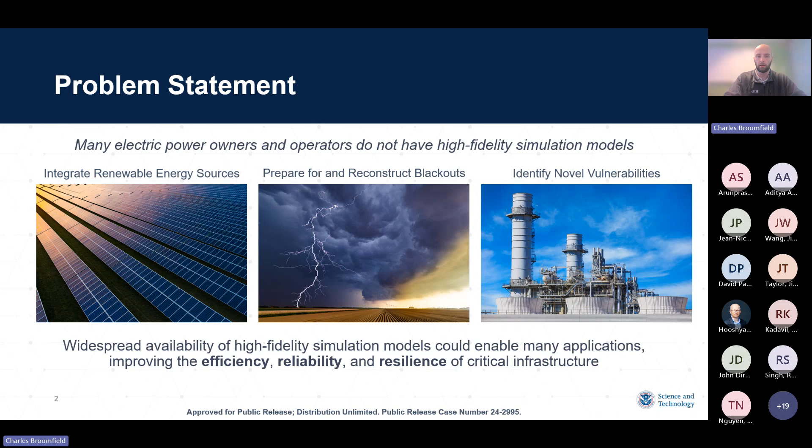So what we really want to see is we want to see high fidelity simulation models in the hands of all of the people who could use them, because these models can be used to support these purposes that we would like to see. So jump to the next slide here.

For the remainder of the talk, I want to cover just four big topics. And first is why developing these models is so difficult, right? So much of our work is trying to get these models into the hands of different people. So why don't they have them? Why are they so challenging right now? Second, I'll talk about the two different ways that we really see automation being used to decrease development time without requiring a huge amount of information from the end user, because that's also a burden.

Third, I'll give you a tour of the critical infrastructure model building application, or CIMBA, which is what we sort of refer to the process that we're building to try and help either solve this problem or at least alleviate that problem. And then lastly, I'll just talk about some of the design principles that are shaping our work today, as well as really shaping our work in the future as we continue to develop this and try and push this forward.

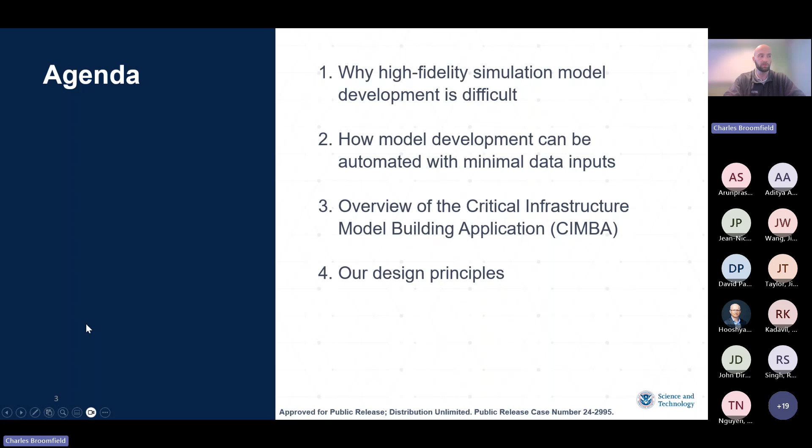So, as I said earlier, a lot of electric power owners and operators don't have the high fidelity simulation models of their own networks, much less digital twins. But these models are very useful. So the question is, well, why don't they have these models? What's getting in the way of them having this tool, which we know can be used for so many different uses? And the short answer is because building these models is really hard.

So one of the big challenges that we've heard is just how time consuming it is, because it can take a very long time to assemble a simulation model of an entire grid that we're trying to model. So even just getting your head around all of the infrastructure that's out there takes a lot of time, much less truly understanding all of the different factors that are going to influence how those components behave in the real world. Now, this is sort of the second challenge, which is just the amount of effort that goes into gathering all of this data.

Because traditionally, building a high fidelity simulation model requires a lot of experts and a lot of work to collect all the precise parameter data for all these different components, which we need to understand to really model this system well. Now, this is a really difficult process, and it also really does not scale very well. It becomes exponentially more challenging as the network grows because there's so many connections and so many parameters to take into account.

But you need these accurate estimates of all these model parameters if you want to have confidence in the simulation results that come out of that model. And I don't think that any of this is much news to any of you. You probably have worked in the space for even longer than I have. But either way, this of course means a lot of experts spending a lot of time, a lot of effort to build a simulation model.

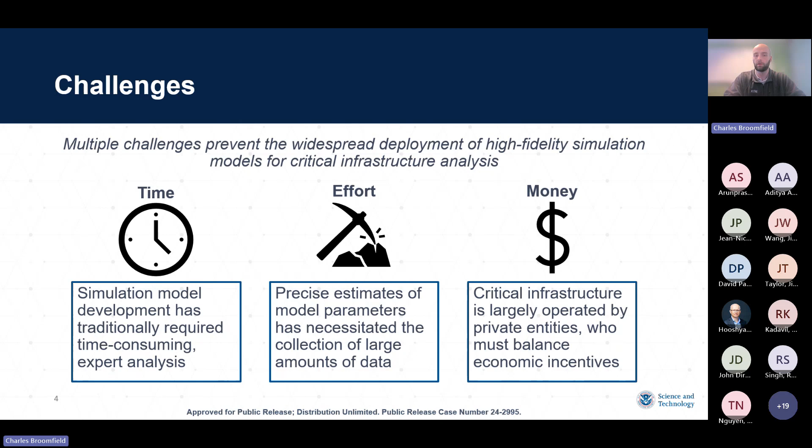And that's where we hope we have some good news, because we really think that some of the steps of developing these simulation models can be partially automated. And there's really two parts of development in particular that we think can really be sped up potentially quite dramatically. So the first thing that we think could be partially automated is this initial assembly of a simulation model. Because these critical infrastructure networks, and especially electric power networks in particular, are extremely large and complex.

So imagine you had a library of all of the different transmission grid devices, and that library would store the parameters for these different particular components, right? That's not a massive database. It's large, but it's not massive. And if you did have this library, then you have all of the building blocks you need already, right? So you would just need to know how to connect them all together, and then all of a sudden you would have a model of the entire network.

So instead of building a simulation model from scratch every single time you're trying to do this for a network, what this enables is you can effectively build it out of Legos. So at least in theory, this model assembly step would get easier with scale as this library becomes more and more complete. And the dream scenario is you have absolutely every single component that's on the network already stored in your library. All you have to do is look up the data that you need. So this doesn't exist right now in the electric power sector, but it's not impossible for something like this to exist. And something like this does exist in other domains, right?

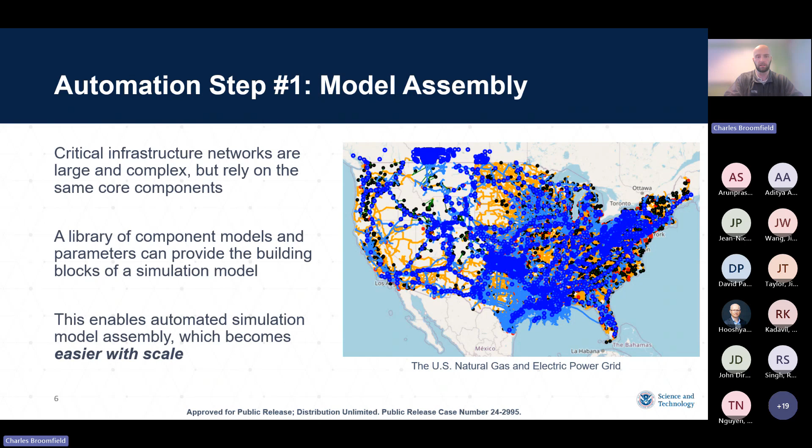It wouldn't necessarily be perfect unless you had absolutely perfect parameter data for every single component, which is a little unlikely. But it would maybe be 80% of the way there with much, much less work than this currently requires. So even though this doesn't automate the full process, this could be really, really valuable in speeding up the time to develop these simulation models.

Now, the second step that can be automated really relies on breakthrough capabilities of machine learning, which of course is all the rage right now. But traditionally, machine learning has not been present in this process. Traditionally, a simulation model has been built by measuring the parameters of the network, either on a real-world system itself or a physical replication of it.

Because if we already have data describing real world network operations, right? We already have the frequency over time for all of these electric generators. Then what we can do is feed this real world operational data back through a machine learning process, and we can accurately estimate the real underlying parameters that produced that original operational data, right?

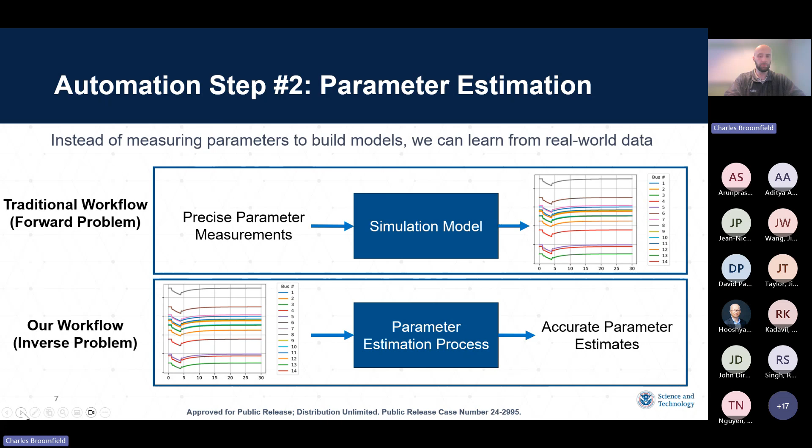But between these two processes that I just talked about, this is why we think it's possible to build high fidelity simulation models without a ton of data from the end user. Because the data can be simplified by either providing it through the reference library, which I just talked about, or it can be learned automatically in this refinement step. So let me take a couple of minutes to walk through what we're actually building.

And we call this the Critical Infrastructure Model Building Application, or CIMBA. And we think of CIMBA as 3 stages, and I'll go into detail on these in a moment. But what I want to point out here on this slide is that these first 2 stages, the model generation stage and the model refinement stage, correspond pretty much directly to the 2 steps I just talked about

in terms of automation. So in the model generation stage, we try to automate the initial assembly of a simulation model. And here we're really speeding up the development by pulling in pre-stored data from a component reference library. So this model generation stage does produce a simulation model, but it would not be considered high fidelity, not at this point.

So in the second stage, the model refinement stage, this is where we're using that machine learning process trained on operational data from a real electric power network to then refine those parameter estimates and end up with a refined, high fidelity simulation model that can accurately perform transient stability analysis. And then that model can be applied for a whole bunch of different purposes in the last stage. So again, vulnerability analysis is sort of the focus behind our work, but there's lots of other things you can do with that.

Now, I do want to emphasize that CIMBA is still in its early days, and there's definitely more research we'd like to do to get this deployed at scale for large power networks. But something I want to point out here, too, is that while we show CIMBA as one big integrated process, the two functions we're talking about here, the model generation and the model refinement, are somewhat independent functions. They're each at different levels of maturity. They each have very different challenges that need to be addressed to really make this work at scale.

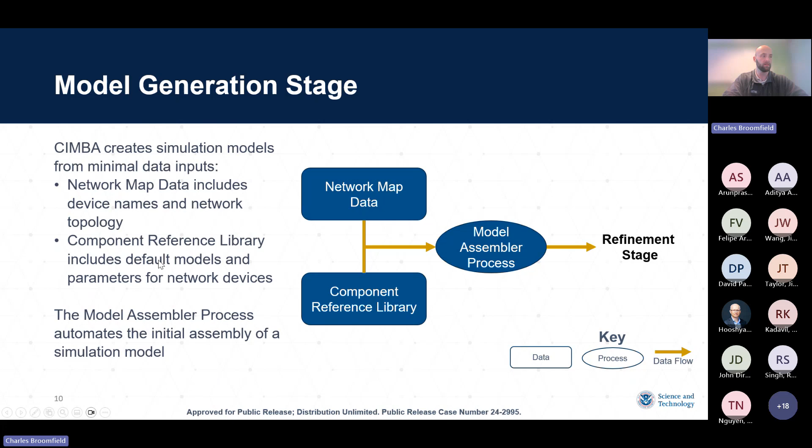No matter what, we would not consider this high fidelity because it's not fit to the particular network it's describing. That's what the next step of CIMBA does: fitting to make the simulation model really precise to the real network. This is where we pull in a lot of machine learning to learn the correct simulation model parameters from operational data. For electric power networks, by operational data I'm really referring to the frequency over time of electric generators. This time series data is our training data for the machine learning.

So if we have this data from real operations, then we can use machine learning to identify those remaining unknown parameters, which would enable high fidelity simulation modeling. So again, we have a rough simulation model that comes out that can perform lower fidelity simulations, but to really do high fidelity simulation modeling with confidence, we have to have pretty accurate estimates of some other parameters that I don't think we'll know without really fitting it to the data of the specific network.

We know there's a lot of potential for an application like this, but here the primary challenge is technical. So just making sure this process can scale, that's the biggest challenge with the model refinement stage. This is actually an engineering problem. Even though we know it'll be useful, we can get the data that we need. We definitely have some challenges to solve here before this can work on very, very large networks.

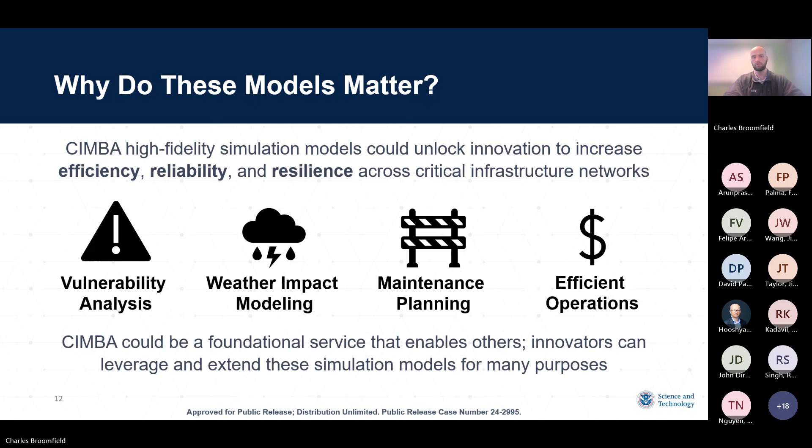Because what we want to do is we want to open the door to lots of different innovators so that they can go and make those applications that are going to improve the efficiency, the reliability, and resilience of electric power networks. Because we don't want to be the ones that are sort of the roadblock for innovation in this space. We just want to make sure that we can tap into the skills of anybody else that can make use of this. But to do that, we do have to be really careful about our design goals. So let me talk about the 4 design goals that are really shaping our past and future works.

So the first thing on the front of our minds is that the whole value proposition of CIMBA is that it should make it easier to develop high fidelity simulation models. So we have to get this part right because this is the value add. We're not making better models than exist already. We already know how to make high fidelity simulation models. We already know how to make digital twins. The value of CIMBA, what CIMBA is uniquely adding, is making that process faster, cheaper, easier.

Now, the second design principle is that we are looking for a physics-based model. And this is really, really important for how we're using machine learning here. Because we don't just want a simulation model that can replicate normal system behavior. And this is the concern that would happen if you use machine learning to learn from operational data. Well, maybe you understand very, very precisely how a network will behave under normal system behavior. But if you don't have a certain perturbation captured within the data that you used in training, then how do you know that this model will generalize?

And the way we get around this is by focusing on physics-based modeling. Because if we can use machine learning just to identify the real underlying physics equations or the parameters that inform those equations, then we can have much more accurate equations, more accurate models. And that gives us confidence in our simulations of rare events, even events that have never even happened before, because we understand the physics, not just replicating what we've seen before.

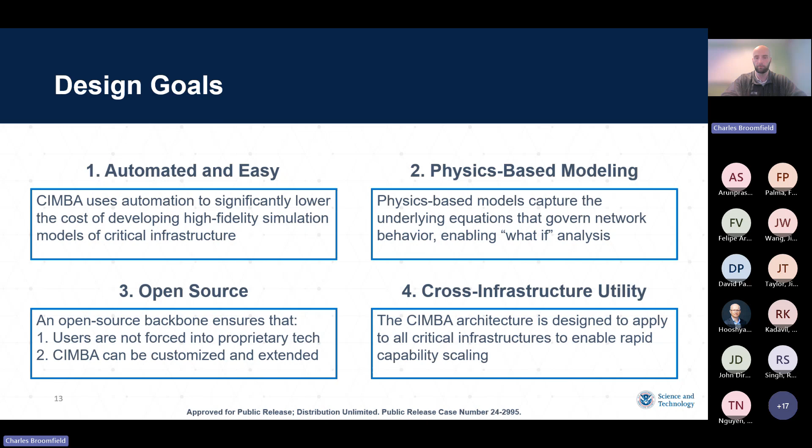So again, we really want to see CIMBA become a really powerful resource, not just for simulation model building for the electric power sector, but really for any sector. We think these simulation models can be really powerful tools for protecting and improving the nation's critical infrastructure. And because of that, we want to make it as easy as possible to get these high fidelity simulation models into the hands of all the right people.

So a lot of the work we've done today could be applied to other critical infrastructures, and it'll take more work to scale them up to those different infrastructures, but we definitely want to lay the groundwork for continued work. So that's my last slide.

I'm happy to answer any questions for the remaining time. I can't talk about everything. There are some parts of this work that haven't been publicly released, but I think I can talk a lot about it. And there are also some things I might have to connect you with some of my great engineers about. But I hope I can answer some questions if anybody has any.

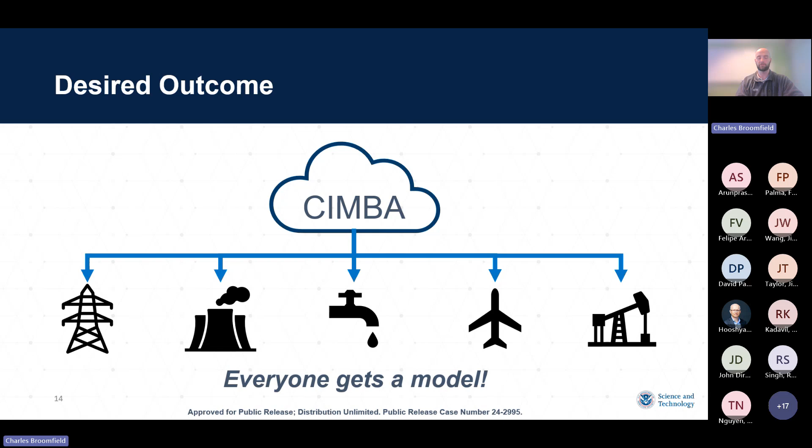Hey Charles, this is Hussein Ushar from New York Power Authority. Thank you for your presentation. I was just wondering if the power grid is the only system that you guys have worked on. Have you applied the same methodology on other systems prior to starting with the electric power systems?

Yeah, so in terms of the model assembler process, specifically this model generation stage, we also looked briefly at natural gas. We are kind of interested in applying it there, and I think a lot of the same principles apply. So we did some preliminary work on that. In terms of the model refinement, though, we've only looked at power because that's a little more, I think, unique to particular infrastructures. The model assembler process, I think, can work with basically any graph.

It's a lot more flexible there, whereas the model refinement and training a machine learning model that can learn from operational data and understand the precise parameters, that's a little more specific. So that one we've only focused on power. I think the same principles can be applied to others, but we haven't done anything with it yet. Okay, thank you.